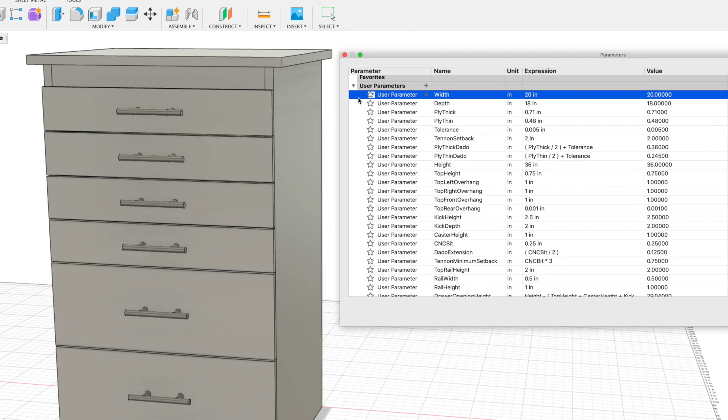I need to build some cabinets for my shop, and as usual, I think I went a bit overboard. Check out this little guy. It is sort of a traditional lower cabinet with drawers you might find in a bath or closet, but this little guy has some superpowers. It can transform into any size and configuration.

Look, here it is as a standard chest of drawers for a bedroom, a nice normal 4-drawer dresser. Here it is hiding out under each end of a desk with a file drawer and 2 others to collect all the junk that winds up on desks. Here are 3 of them working together to make a miter saw station, and what's cool here is that they are the exact size you need for your miter saw to fit perfectly in the middle.

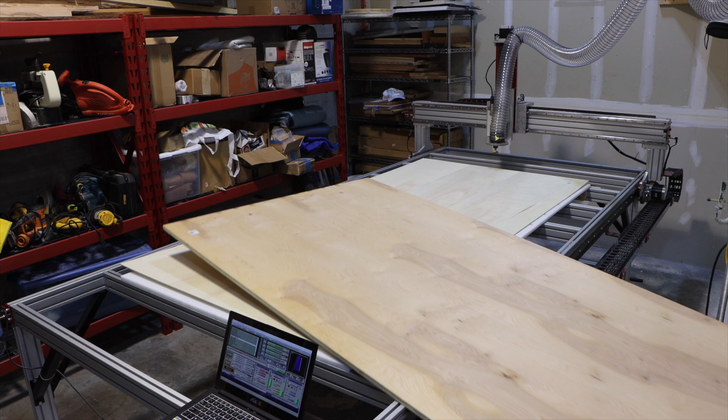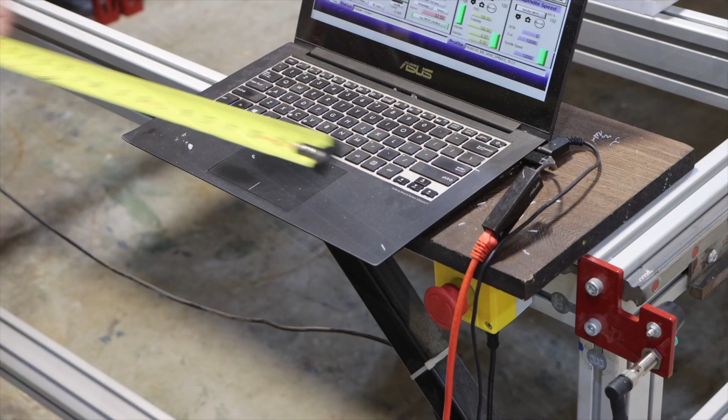And look at this big one acting like a mobile outfeed table for the table saw, or if you wanted a crazy combination outfeed table / assembly table like I want, you could change the top out for something crazy looking like this thing. And of course, for the shop, bath, closet, or maybe someday kitchen, a bunch of them can hang around together under some nice stone countertop.

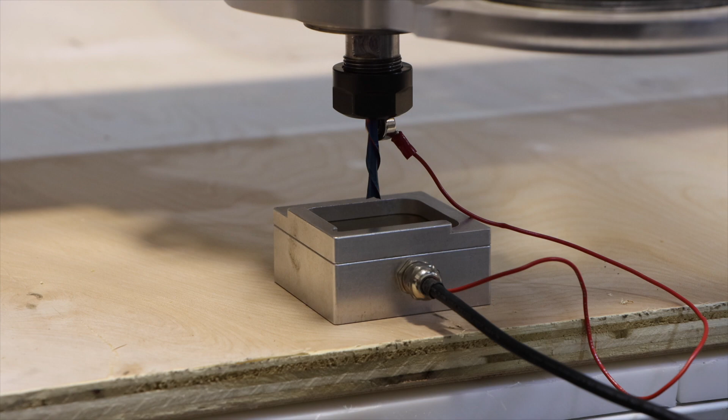All those are the same model, the same fully parametric model in Fusion 360. So you can choose the height, the width, the depth, the number of top and bottom drawers, and the model updates. It is parametric down to the pre-drilling of the mounting holes for the drawer slides based on whatever drawer slide you have. This model was designed from the ground up for a CNC. However, I think it could also produce really useful cut lists for non-CNC builds as well.

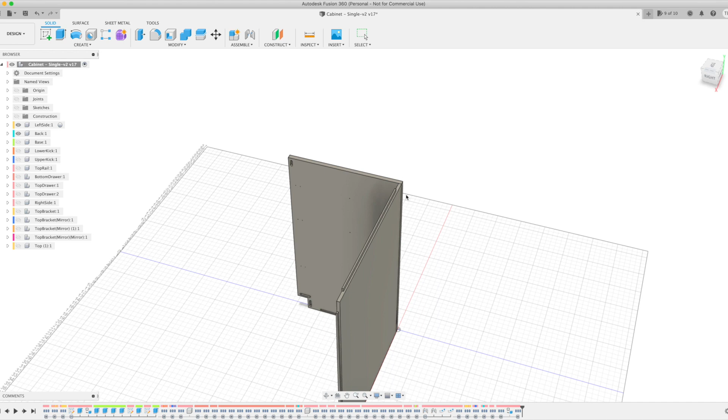I've actually already made versions of uppers, versions with doors and shelves. But more than just share the files, I want to see if I can build a little community around this project. One that may submit different door designs, different hardware options, different cabinet layouts. Who knows where this could go?

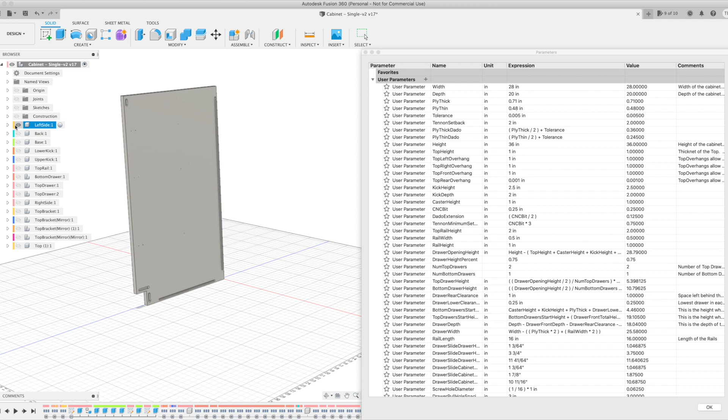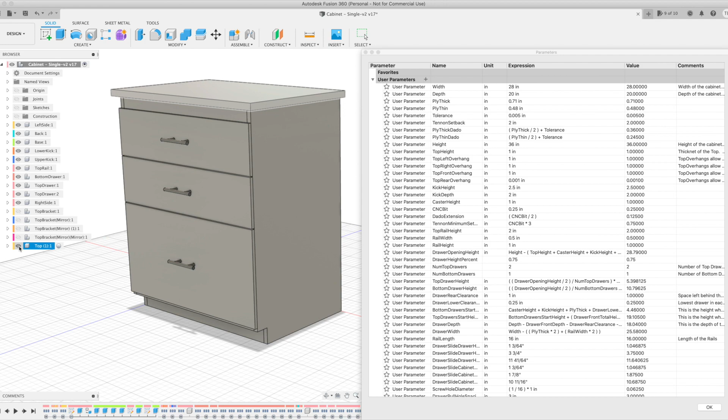And with the cost of cabinets skyrocketing, one closet design, one big garage renovation, maybe in the future a bath or a kitchen, could easily justify the cost of a CNC. So I'm going to build my first prototype of this model today and walk you through the model. This is how I made it.

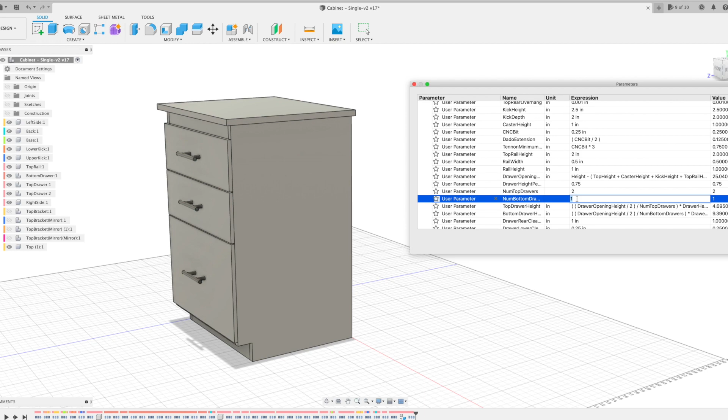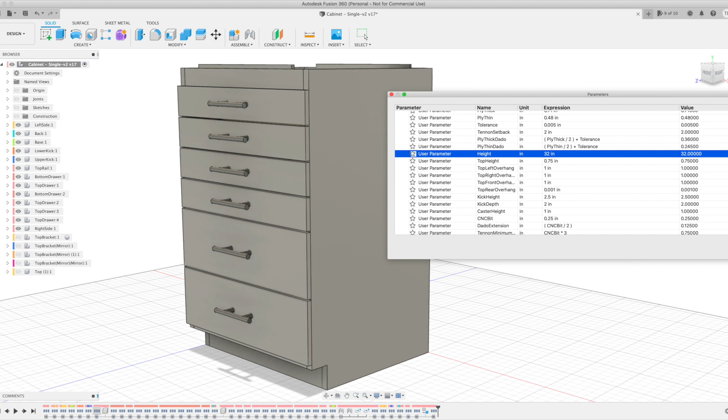I'm going to throw a 3/4 inch piece of birch cabinet grade plywood on the CNC and get my first cuts going as I explain this model. This was an idea I had over a year ago to better organize my shop, and back then I searched for some models of traditional cabinet drawers, specifically in my case for the CNC, and while I found some, I really could not find this, a parametric model for what I thought was the most common form of a lower cabinet. And that surprised me because to me this was sort of the unwritten promise of a CNC, to print your own furniture.

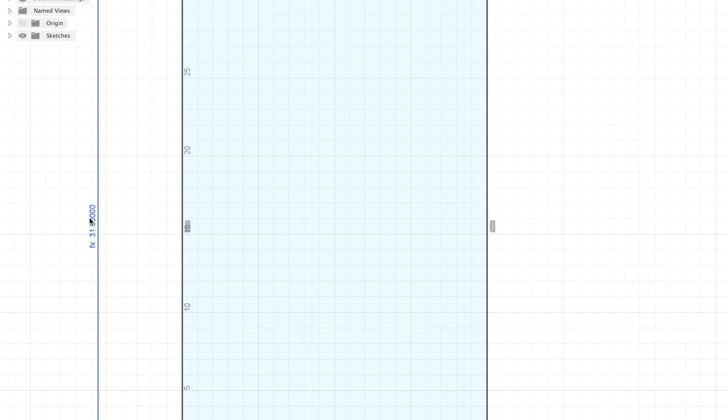There's the Open Desk project where you can select your style of mostly flat pack type desks and some other types of furniture, but nothing for cabinets. It also doesn't help that these standard CNC style joints are really ugly and they don't really lend themselves to cabinetry. But I know enough about CNC to know that those types of joints aren't necessary. So you'll find no dog bones, no through joints, no box joints in this model. This model uses the CNC to lay out more traditional dado and tenon joinery in most cases.

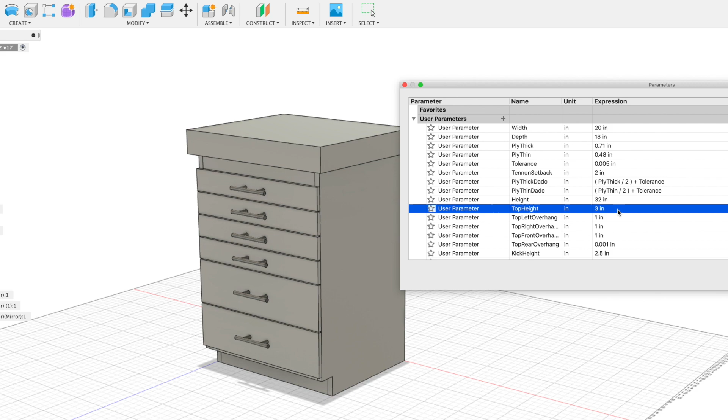And I know there's commercial cabinet design packages, and if you ever ordered custom cabinets, a lot of those businesses actually use software to design their cabinets and have them made in large part by CNC in a factory elsewhere. But I could not find that sort of free or DIY version.

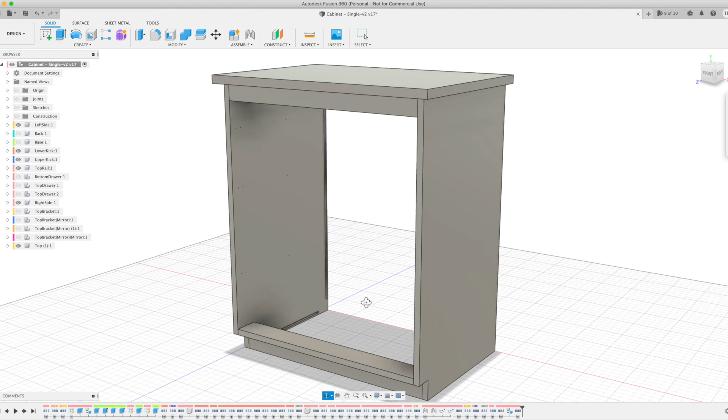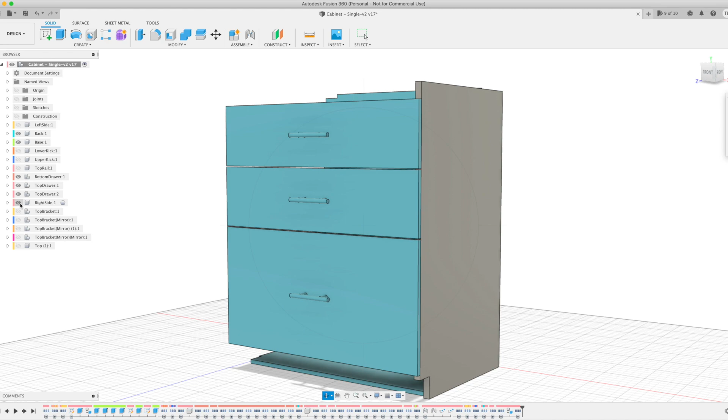But we've got Fusion 360, which is parametric and free, so I decided to try and make my own model and learn Fusion at the same time. I've gone through several iterations and I'm finally ready to share my model. And for the record, this is really my first project in Fusion, and I'm likely to have made a ton of mistakes, so Fusion people, take it easy on me, please. It's also the first time I've ever built a traditional cabinet, so cabinet guys, also take it easy on me.

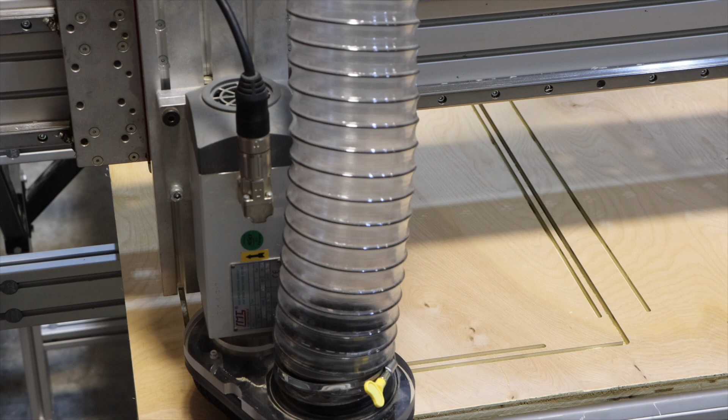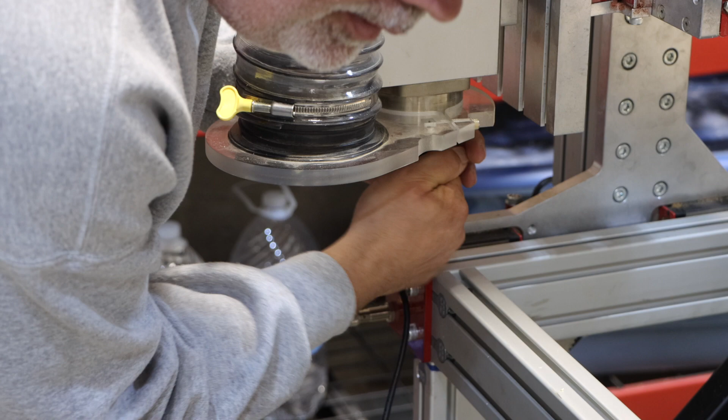You may have noticed that my CNC laptop is sitting on a piece of scrap wenge, perched on one corner of the CNC. And so for this prototype, I'm going to create a small cabinet that is 18 inches deep, 20 inches wide, and the height of my CNC table, which is about 32 inches off the floor. I'll then select 2 bottom drawers, which can hold my clamps and larger items for the CNC, and 4 top drawers, which can hold my bits, my hold down solutions, my wrenches, and other smaller items. I can select those parameters in Fusion and everything will recalculate.

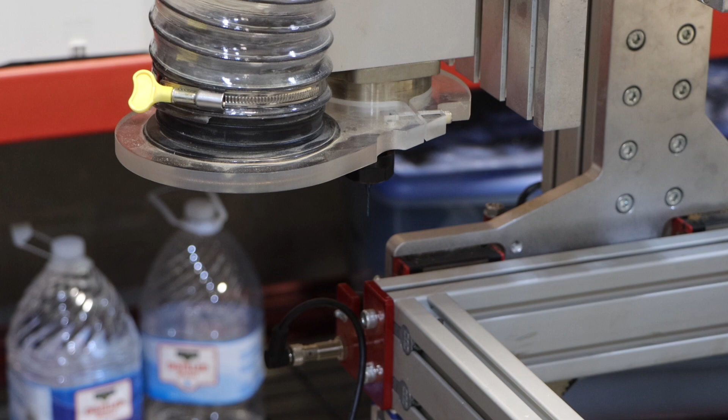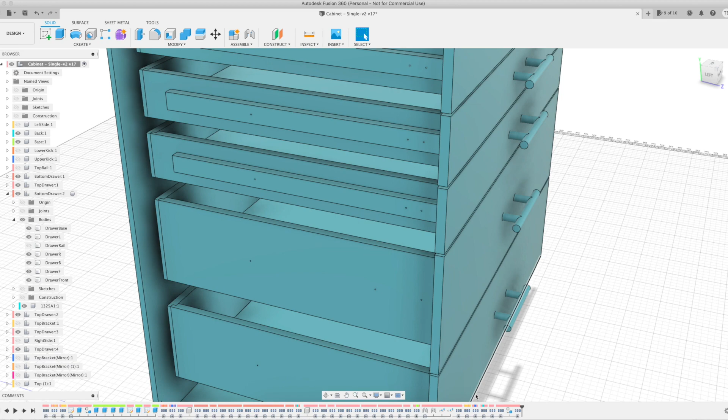I keep saying that word parametric, and briefly, for those of you who may be unfamiliar, that's what this means. This model is driven by parameters. There's no actual measurements in the CAD design. Everything instead references parameters, and everything is built mathematically from those parameters. Take height, for instance. Simple 32 inches. However, that is the height overall. When I go to set the height of a side panel, for instance, the height is actually calculated for that panel as height minus the caster height. The caster height can be used if you want to add casters or feet to the project.

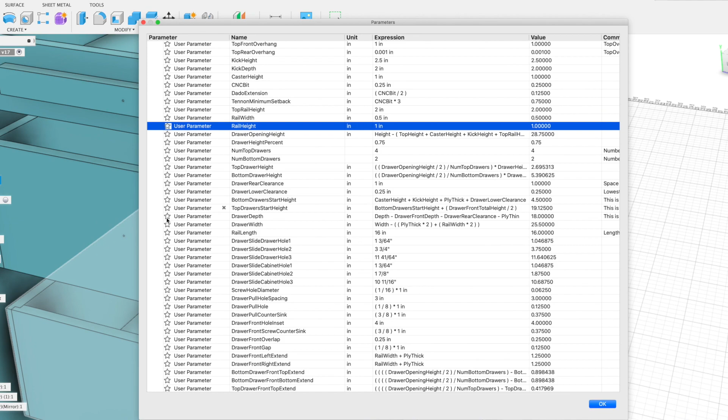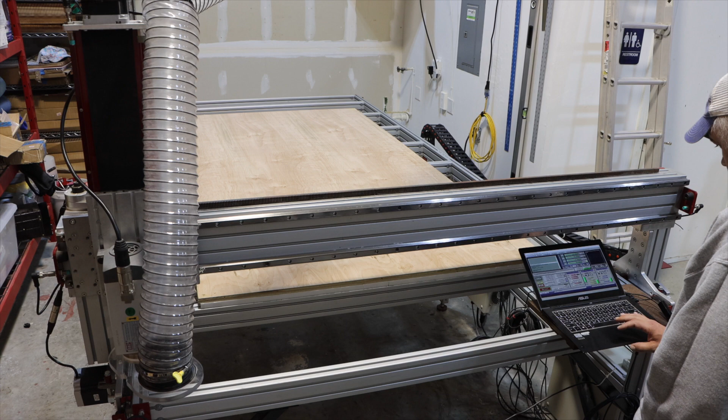When I go to one of the extrude commands for that panel, you can also see that the top is cut down the depth of the top height, also a parameter. So everything in the design changes to make the height stay 32 inches. If I add a 3-inch top, the cabinet and all the drawers adjust slightly so that the height remains the same. This model currently makes the cabinet using 2 thicknesses of wood, and these are parameters called ply thick and ply thin. I realize I need to add separate definitions for the drawers to allow different thickness options there. In fact, as I built the prototype, I realized I needed to make quite a few changes to the model, and I'll cover many of them toward the end of this video.

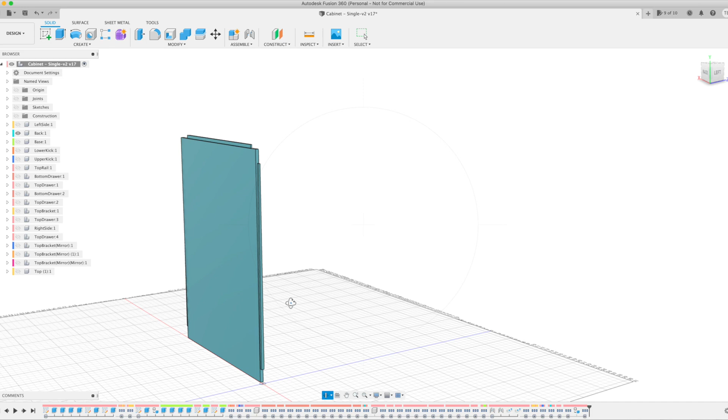The 3/4 inch ply is used to make the left and right sides of the cabinet, the lower and upper kick panels, the top rail, and in this case I'll also use it to cut the top. The rest of the cabinet will be made out of 1/2-inch plywood: the base, all the drawer parts, including the drawer bottoms, and also in this case the drawer fronts. However, you can select a different thickness of drawer front. Just realize the rest of the cabinet will adjust to make sure the depth of the cabinet will be correct.

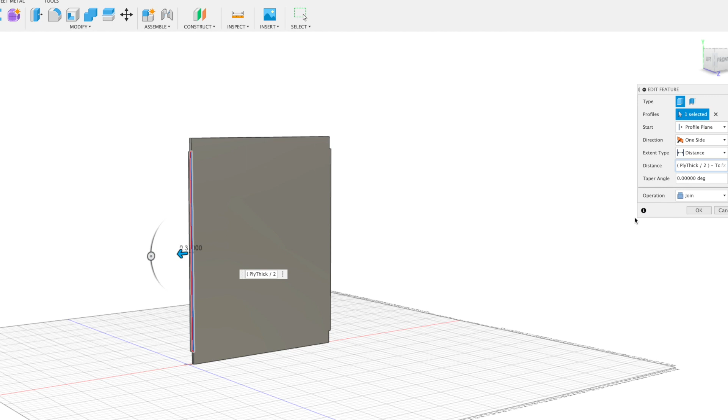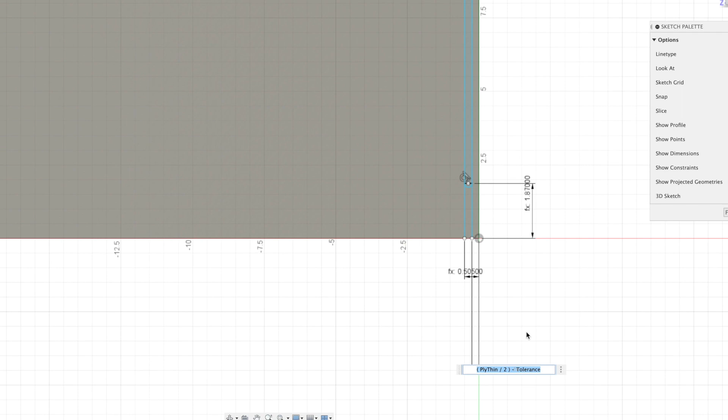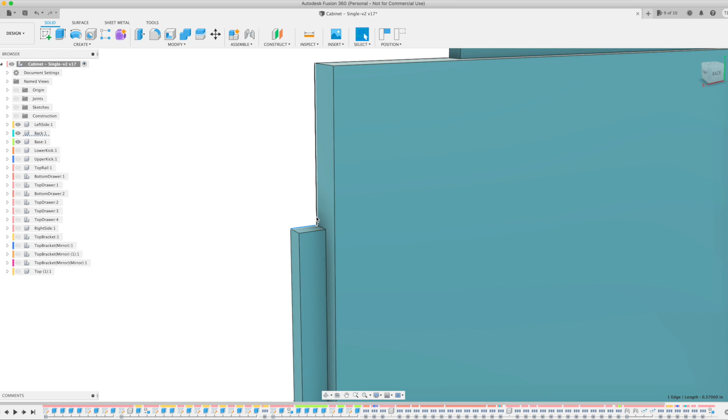Now I'm going to switch to a 1/16 inch end mill just to drill some pilot holes. For the sides in the model, I patterned the drawer slide holes up the side. Those drawer slide holes are actually parameters as well, and you can basically set the distance for the 3 screw holes on the cabinet side and on the drawer side themselves. The idea here is that you don't have to measure anything during assembly. If everything fits together as it should, you should be able to just attach the drawer slide components using these pilot holes, and everything should line up perfectly.

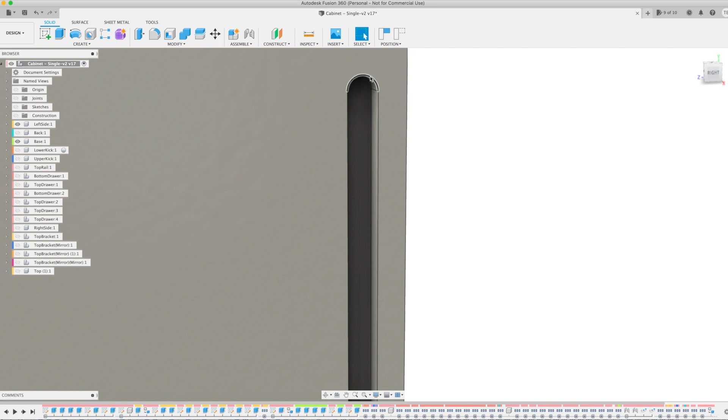And spoiler, this actually worked. However, using a 1/16 as a pilot hole was a little silly since they immediately disappeared with paint. I ended up using a screw and a punch tool to make those pilot holes larger when I assembled the prototype. In the future, I'll set those holes to be 1/8 of an inch, and that will simplify my tool paths as well. And of course, every screw hole diameter is also a parameter, so you can customize those as well.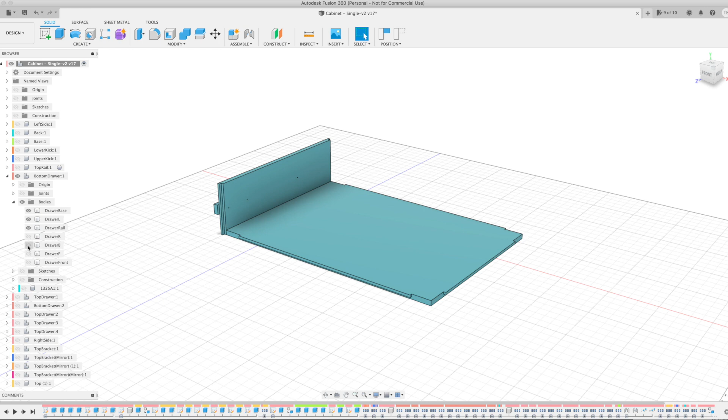Okay, let's add a sheet of 1/2-inch ply and set up for the next CNC run. This sheet's going to get me the back, the base, the 2 bottom drawers, and a couple of parts for 1 top drawer. Let's talk briefly about the tenons and dados. And this can get confusing pretty quickly.

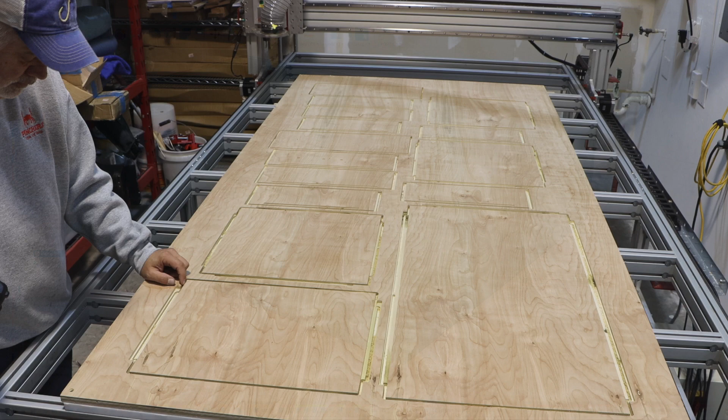In most cases, the tenon is set to be half the thickness of the material. In this instance, tenons on 1/2-inch material is 1/4 inch. On 3/4 inch material, it would be 3/8 of an inch thick. The length of each tenon is half the depth of the mating piece.

So for instance, the back slides into the left side here. The back is 1/2 inch and the side is 3/4. So the length of that tenon is set to half the depth of the side minus a tolerance, and that tolerance is of course also a parameter.

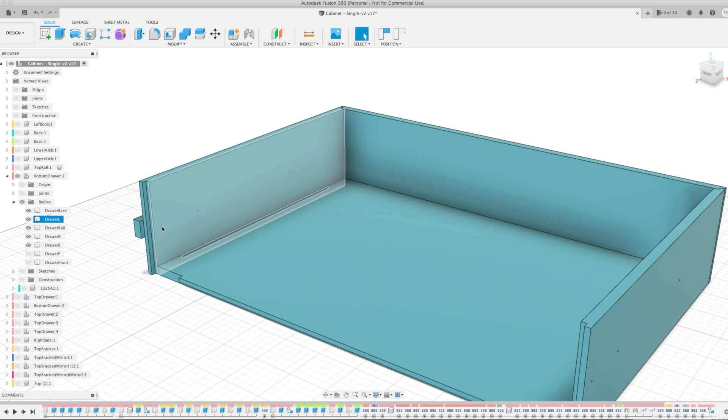The width of the dado on the left side that will receive that tenon would be half the thickness of the back, with that same tolerance added to both sides, making the dado just a little wider than the tenon. The depth of the dado is simply half the depth of the part it's on. So on the left side it's 3/4 of an inch, that depth would be 3/8 of an inch.

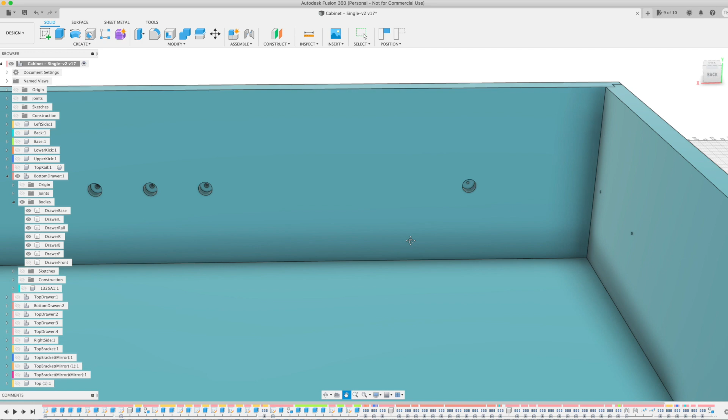And during the build, I also realized I may need more than one tolerance to get better results, but this did work fine. Now, when you're CNCing a part such as this tenon, you will not get right angles as shown in the model. There'll be a slight curve in that corner that is the radius of the cutting bit, and that would prevent the tenon from sitting fully into the dado.

So I first added a parameter to the model for the actual CNC bit size you are using, and in my case that's a 1/4 inch bit. And then I added a dado extension parameter that is half the diameter of the bit, and that makes the dado a little longer on each side so that the tenon fully seats. I also added a round to the end of each dado. This is not really functional, but I thought it looked better.

So that's the basics of how a lot of pieces in this model mate together. The drawers do it a little differently. The base of the drawer has tenons on all 4 sides that fit into dados on each of the drawer sides. I wanted this entire project to be a one-sided job. With 2-sided jobs, we could do much more complicated joinery, but with the dados in place, the joints for the sides need to be done from the inside faces.

Here, I use this sort of half-lap butt joint idea for the sides, and this worked in the prototype, but I think I'm going to make some changes to this joint. If you do not perfectly get the Z depth on these cuts to half the thickness of the material, you will have a gap in one of the mating faces, and that is very difficult with plywood.

Over the course of my prototype, I walked around and measured the depth of my dados and the depth of my tenons. They were simply all over the place, from a few thou off to 10, 20, even 50 in some cases. Now I know the frame of my CNC is as square and flat as I can get it. I know my spoil board is flat and I am in tram, but the plywood thickness varies a lot over the board, more than I thought it would.

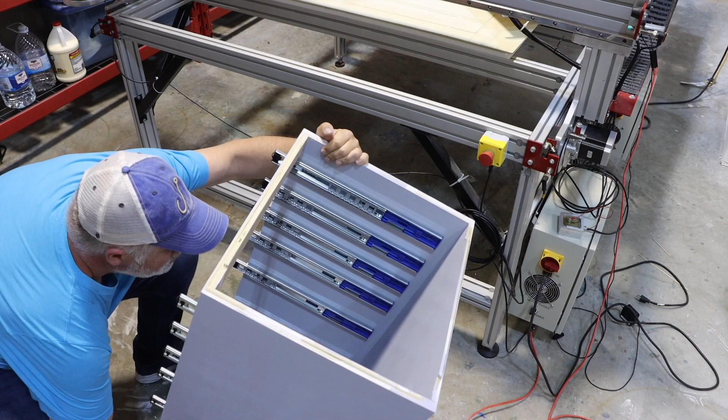I just wanted to test fit the top to make sure everything was square, and it was. I'll do a dry fit for the drawers as well to make sure they fit together nicely, and test the strap clamps I'm going to use. And it does fit together well, however you can see that very small gap in the corners. I'm sure the glue there will still grab and they'll be plenty strong.

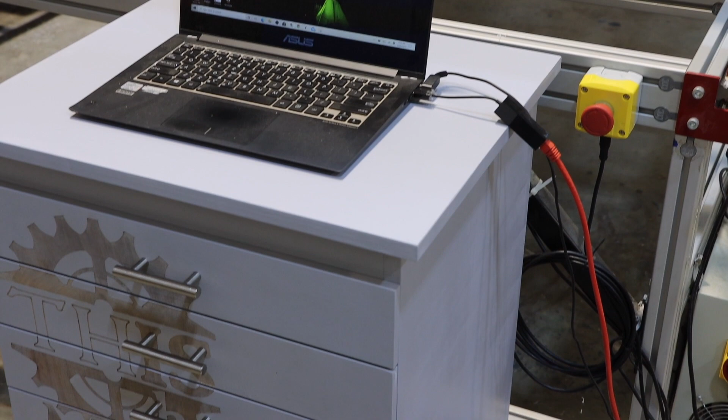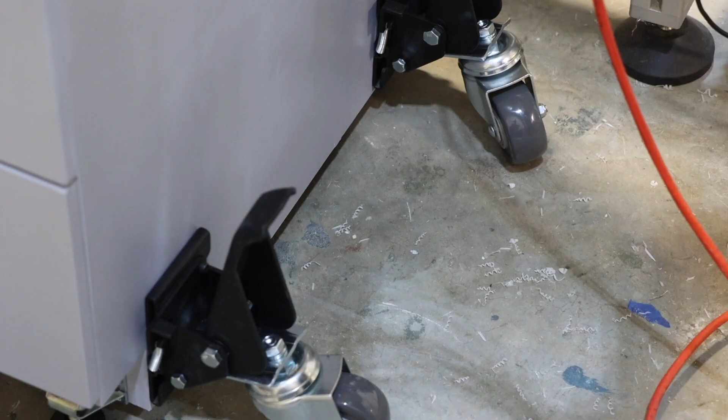Onto the glue up, which was fairly easy after the dry fit. I did not use any screws in this prototype, just glue and brad nails. You may want to, but as you'll see later, I moved this cabinet around quite a bit and it was solid with just glue and nails. I went on to gluing up the drawers, and I will say that strap clamps come in very handy during this process. I think I bought 8 for this project, and I think I'll go back and purchase another 6 or so. For the deeper drawers, it really helps clamping on the bottom and the top.

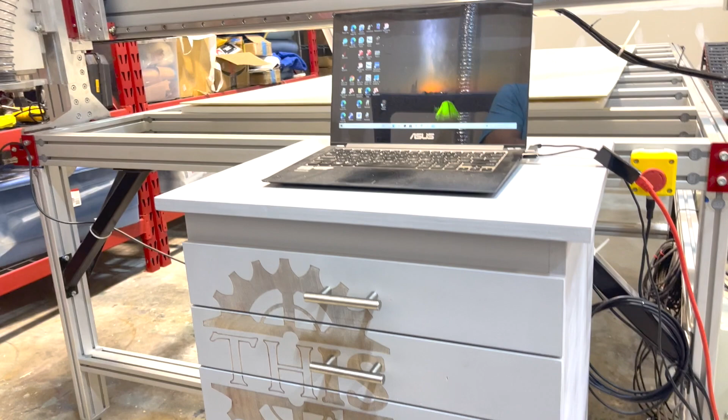As soon as I got to a point I could test fit one of the drawers, I couldn't resist doing so. This was the point that I had in my head where, if my model was right, that I could mount the drawers without measuring. And it worked. I have to say that up until this point, I didn't really care much about this build. I kept telling myself that this was just a prototype, and the mistakes didn't matter much. And then that drawer fit so perfectly that I sort of became attached. I was suddenly holding wood putty and didn't know why.

I started sanding everything, the carcasses, the drawers, breaking the edges. Paint and primer appeared and I started painting, a good primer coat followed by one coat of tinted Behr paint. I refused to do a second coat. This was, after all, a piece of shop furniture.

Now, as I planned to use this design first for my shop, I set the kick height to 2.5 inches, knowing I wanted to put adjustable leveling feet on my cabinets. I'll attach those here under the kick and on the back. And I also want my cabinets mobile, so I'll attach a removable locking foot clamp near all 4 corners. I'll show you this in action later. And then it was time for final assembly and installing a whole bunch of drawer slides.

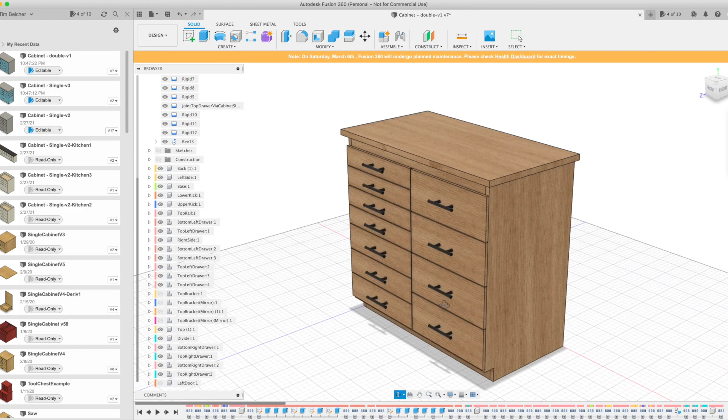In my original design, I actually made pilot holes in the back side of the drawer front for the mounting holes. The thought was that if it were perfect, that this would make all the gaps even right out of the box, and that may be true. I ignored them in this build as they filled with paint. I instead used the drawer pulls to tighten the drawer front on, and that let me manually adjust the gaps a little bit, and then a couple of spring clamps to hold it, and I could drive some screws home.

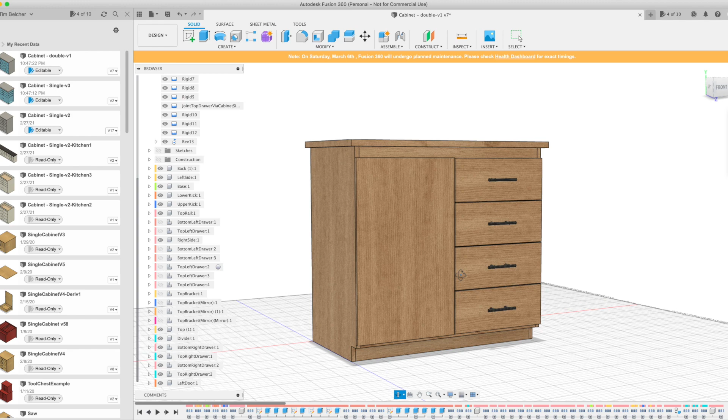And just how tired do you have to be in the shop to do this? What the...

It was time to move it to the floor and finish it up. The model has 2 ways to attach a top. This one uses tenons from the front top rail and back, and I'll just glue this top in place. You could suppress those tenons in the timeline and instead cut some corner brackets that might better allow for different materials or wood movement. And these would just be glued and nailed in place by hand.

Well, here it is in all its glory. I think I really should have put a second coat of paint on it. Anyway, let me show you the mobility solution. You simply slide these wheels into the locking clamps on all 4 corners, and then lift and lock the cabinet up on wheels. And this to me gives me the best of both worlds in the shop.